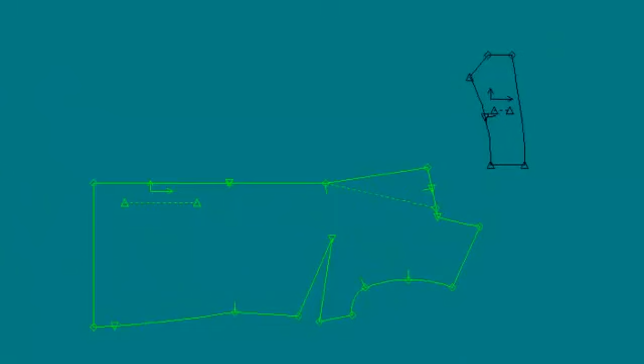Grading front with lapel and collar. Lapel and collar from page 10.5 in the compendia have been used. We will need the front piece with the lapel and the lapel roll line from the construction, and we will need the undercollar. We also need a correctly graded front and back piece to copy grade rules from.

We will start preparing the front piece for grading. We extend the lapel roll line beyond the shoulder points. Points, modify points, move point line slide, selecting the top points here and extending it beyond the shoulder.

Split the roll line in the intersection point between the roll line and the extension of the shoulder line. Line, modify line, split, clicking right, selecting intersection, selecting the shoulder line first and the extended roll line as the second. Delete the surplus line. Line, delete line.

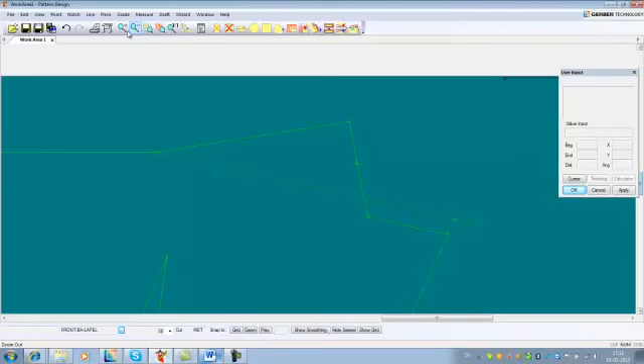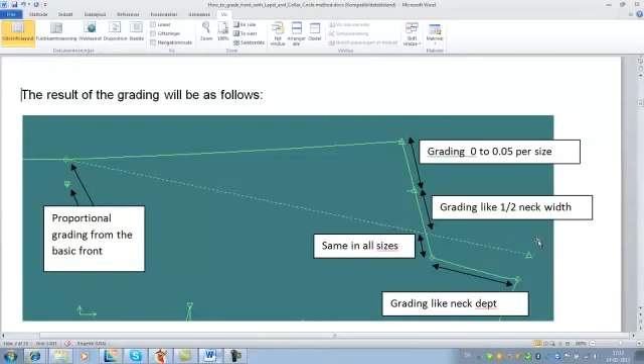The result of the grading will be as follows. The upper button and the beginning of the roll line will have proportional grading from the basic front. In this case it is close to the bust point, so I will have the X grading 0. If it was closer to the waistline, I could take the X grading from the waist or something in between.

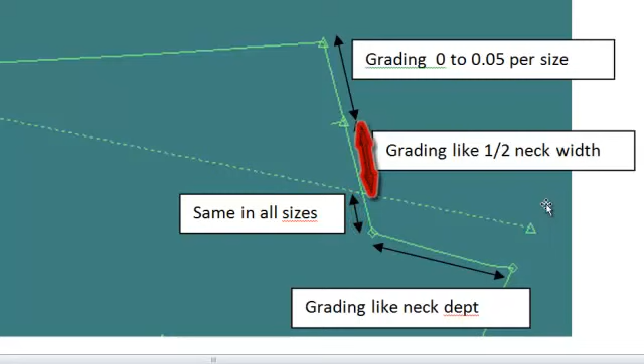This line will be grading like the neck depth. This distance to the roll line will be the same in all sizes. The lapel seam will be grading like half the neck width, and the lapel point will be grading with 0 or half a millimeter per size. These three angles must stay the same in all sizes.

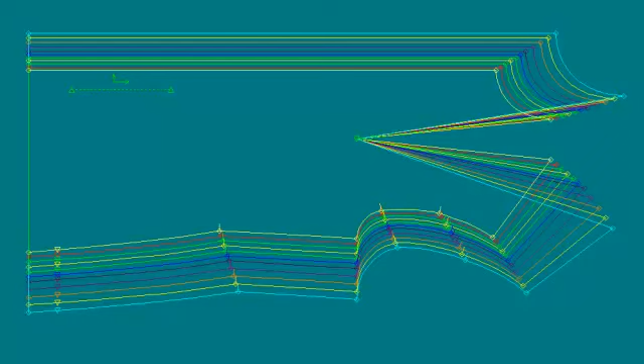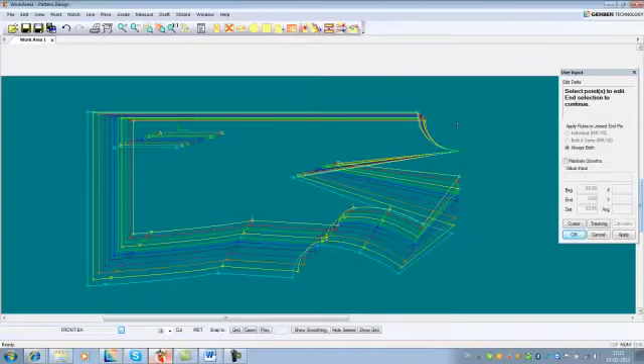To do this, we need to know the grading of the neck depth and half the neck width. That can easily be read from the correctly graded front by stacking in the shoulder points. View, grade, stack here. And now the grading of the neck depth and half the neck width can be read in this point. Grade, create edit, edit delta, like this. 0.15 from size 34 to size 46 and 0.22 from size 46 to 50.

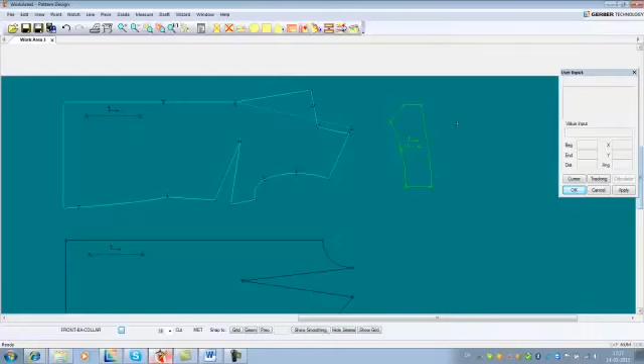We can now start grading the lapel. Note that the set point on the front pattern we want to grade and the basic pattern we copy rules from must be the same. I will start by grading the intersection point between the front edge and the lapel roll line. Grade, create edit, edit delta. The rest of the piece has been graded according to the rules from the basic pattern. This video only describes the grading of the lapel.

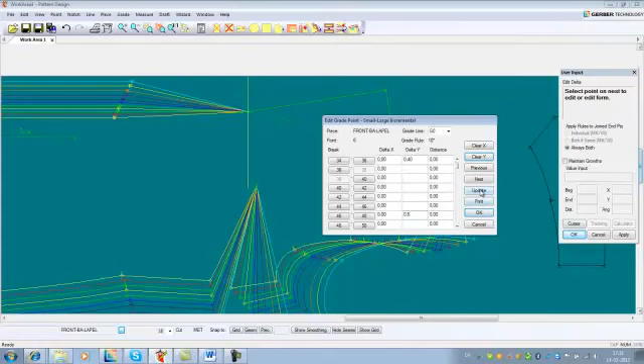As mentioned before, I would like the X grading in this point to be 0 because it is pretty close to the level of my bust, which is my set point. And the grading in the Y direction will follow the grading from the basic with 0.4 and 0.6, which is the grading of half bust prominence width. I will copy this grade rule to the end of the lapel roll line. Grade, modify, copy grade rule from the perimeter line to the end of the internal roll line.

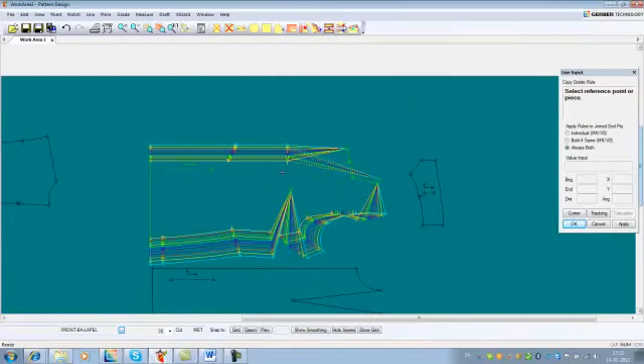Now I will grade my shoulder point and the top of my roll line with the same rule as on the basic pattern. Grade, modify, copy grade rule, copying this rule to this point and this point.

Now I will create an intersection point between the lapel roll line and the lapel seam line. I will need the point on both lines. Point, point intersect. First I select this line, then this line, and apply, and then in the opposite order. This line, and OK.

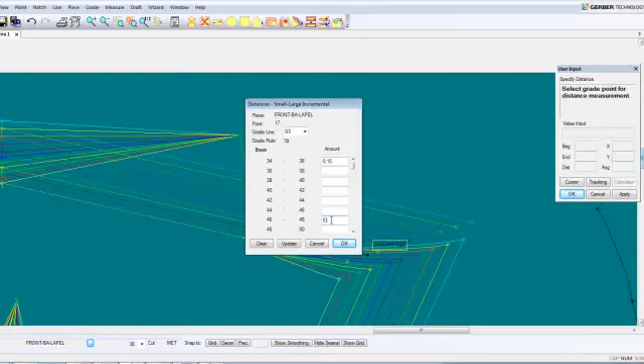Now I will grade the point on the roll line with the neck depth grading using specified distance from the top point of the roll line. Grade, create edit, specify distance. I would like to grade this point, measured from this point, with the grading of my neck depth, which was 0.15 and 0.22. Update and OK.

Now I have the grade point on my roll line and I would like to copy it to the same point on my perimeter line. Grade, modify, copy grade rule from the internal line to the point on the lapel seam.

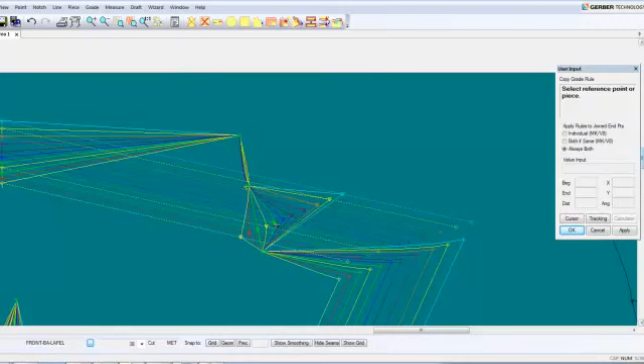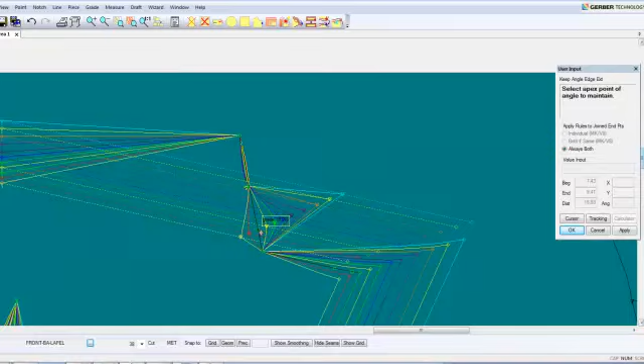Now I would like to grade this point, keeping the angle to the roll line in all sizes. Grade, create edit, keep angle edge extension. I will grade this point, keeping the angle here and here, and the distance should grade with 0 because I want the same distance to the roll line in all sizes. 0, update and OK.

I will now continue grading the next point. Grade, create edit, keep angle edge extension. I would like to grade this point, keeping the angle to the roll line here and here. And this distance should be grading with half the neck width, 0.15 in the smaller sizes and 0.22 in the bigger sizes.

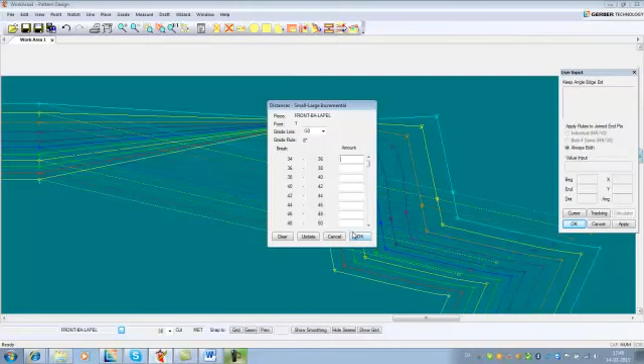Update and OK. And I continue with the last point, grading this one, keeping the angle here and here. And this should be grading with 0 or half a millimeter if it makes a nicer line. In this case, I will just take 0. Update and OK. Now I can check if all the angles are kept by using the stack function.

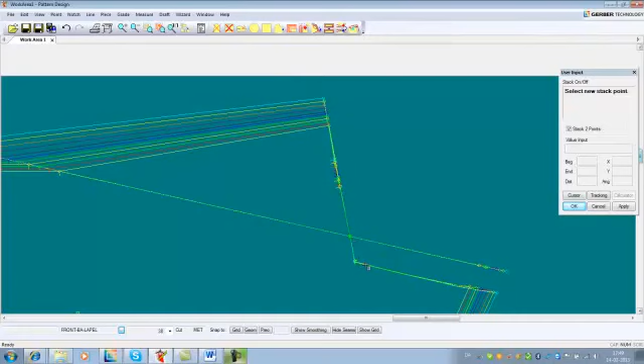I go to View, Grade, Stack on off, and I select 2-point stack and I stack in my roll line like this, and I can see that all the lines are in the same angle. I go back because I don't want to keep it stacked like this. It was only for control.

I now finished grading my lapel and I can start grading my collar. The result of the collar grading will be as follows. This angle must stay the same in all sizes. This angle must, if possible, stay the same in all sizes. This length will be grading the same as the lapel point, 0 or half a millimeter per size.

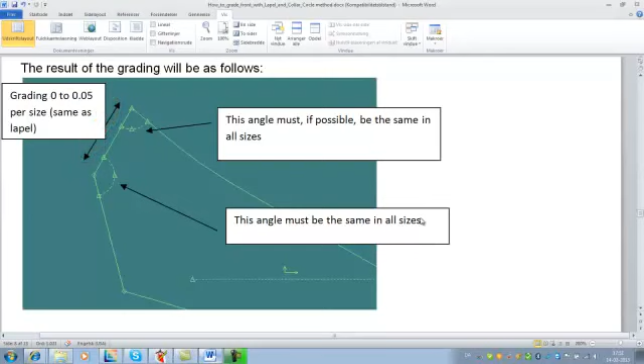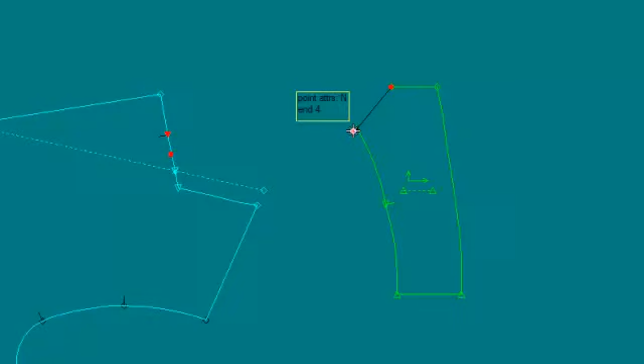I will start by placing the collar onto the front piece. Piece, modify piece, set and rotate, lock. Target point, target line, match point, and match point on set piece. Popping up and 0 in the distance field. Like this. And I will realign the grain on my collar. Piece, modify piece, realign grain, and I select the grain line like this.

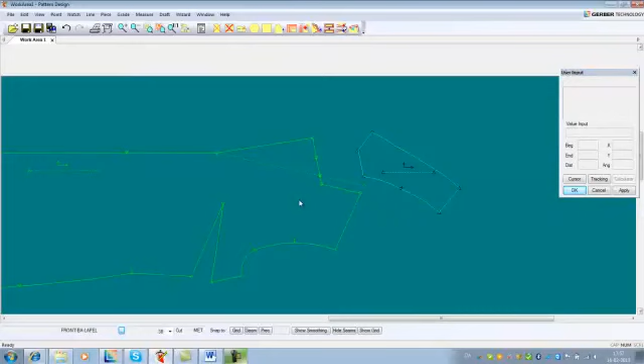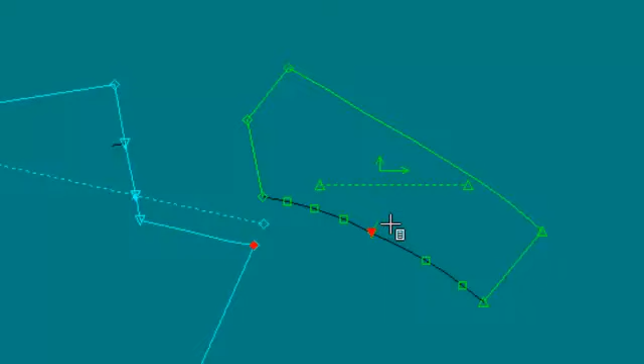Now I can copy the rules directly from the front piece to the collar. I can copy the following 3 rules. Grade, modify, copy grade rule. I can copy this one to this point, this one to this point, and this one to this point. If I look at it now, it looks funny. But I can continue grading the next point.

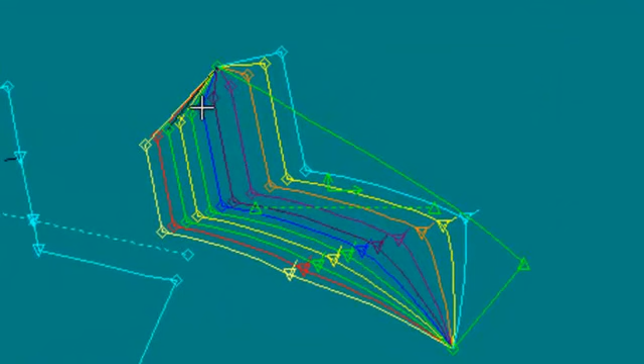I will now grade this one, keeping the angle here. Grade, create edit, keep angle edge extension, grading this point, keeping the angle here, and it will be grading like the lapel with 0 per size.

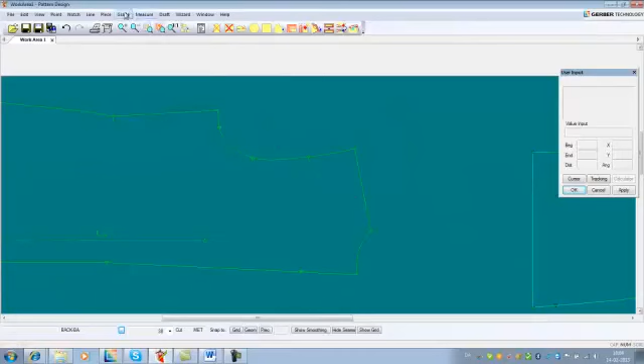Like this. Next step is to grade the back of my collar, and to do that I will need to know the grading of my back neckline. I find my graded back piece and I go to grade, measure line, and I can see that half my neckline is grading with 0.16 and 0.25. I now need to stack on my shoulder point. I go to View, Grade, Stack on off, and select the shoulder points.

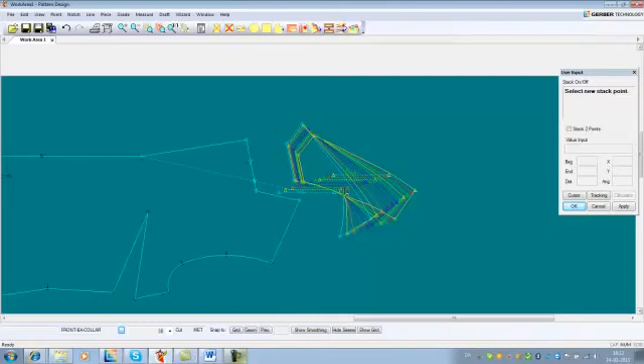Then to grade the back of my neck, I will go to Grade, Create Edit, and Create Offset. I will select Previous Next in the user input box, and I select the point to grade. And I can now type the grading of my neckline, 0.16 and 0.25. Update, and OK. I do the same for the next point.

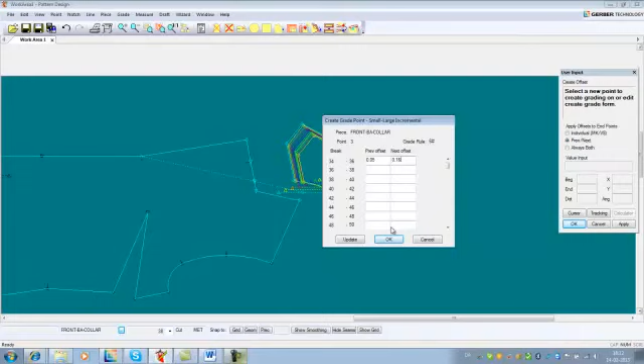Here I will type the grading of my center back line of the collar, which is 0 or half a millimeter for better line shape. I will in this case do 0.05, and in the next offset I will say the grading of my neckline, which was 0.16 and 0.25. And OK.

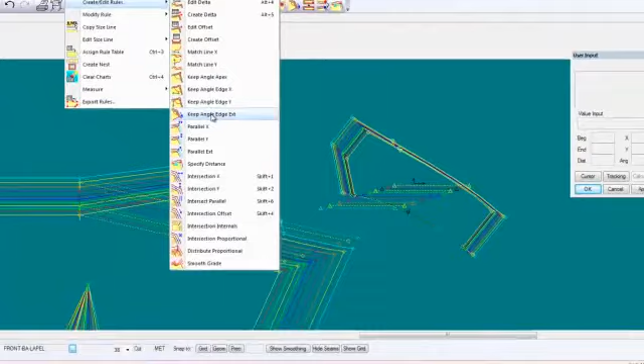To maintain the angle at the collar point, we can add an extra grade point if it's not already there from the construction. Grade, modify rule, add grade point, and we click on the line and place it 5 to 7 centimeters from the collar point. Like this, and then we can grade this point with Grade, Create Edit, Keep Angle Edge Extension, grading this point, keeping this angle, and grading 0. Update and OK. Changes the line shape a little bit.

Then we trace the piece to get rid of the stack points before saving. Piece, create piece, trace, and selecting the lines in a clockwise order. Like this, and naming it.

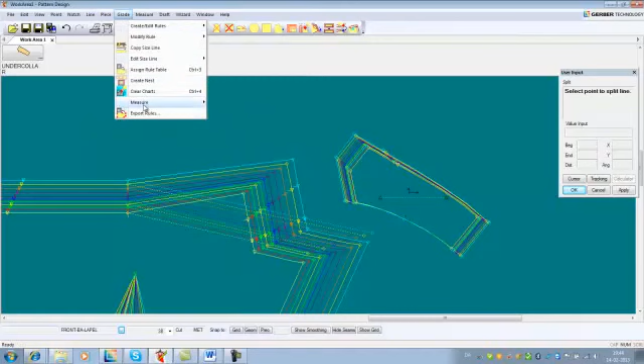To check that the collar is grading correctly, we can split the line in the shoulder notch. Line, modify line, and split here, and then we can say grade, measure line, and check that the back of the neck is grading like the back of the neck should, with 0.16 and 0.25, and the same on the front. Neck drop front 0.15, 0.22, and half the neck width 0.15 and 0.22. It is a little difference here, but that's okay.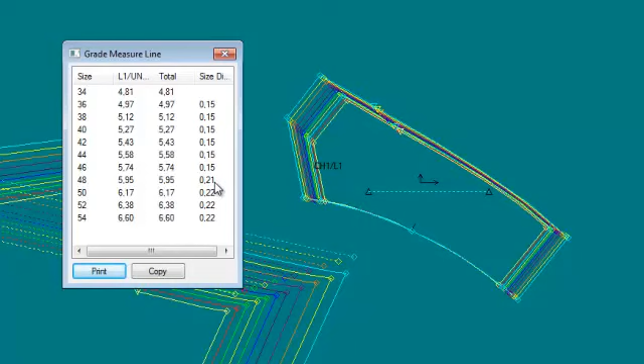For the undercollar, the grain line can be kept like this, or it can be rotated and aligned on the x-axis. The rules can be copied to the top collar and the facing.

If you want to mirror the collar in the center back seam, you use 2-point stack to stack in the center back instead. View, grade, stack on off, 2-point stack. Here and here. Then we rotate the piece along the x-axis. Piece, modify piece, rotate piece. Mark this perform alignment, select piece to rotate, and line to match the x-axis.

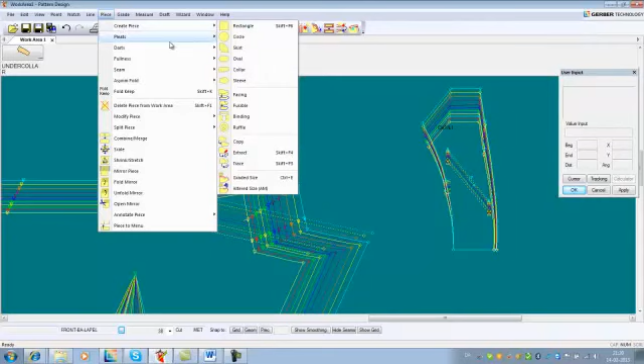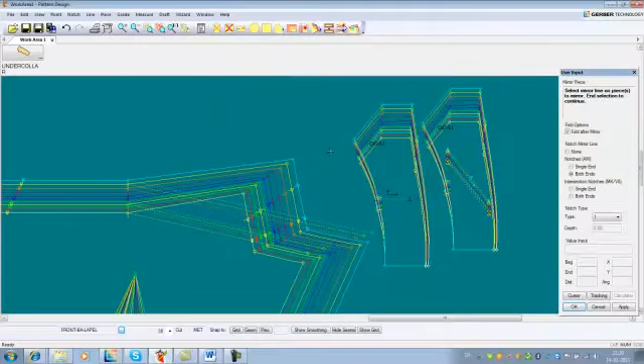Trace the piece again before saving. Piece, create piece, and trace, selecting all the lines in a clockwise order. Like this. And mirroring the piece. Piece, mirror piece, fold after mirror, and save.